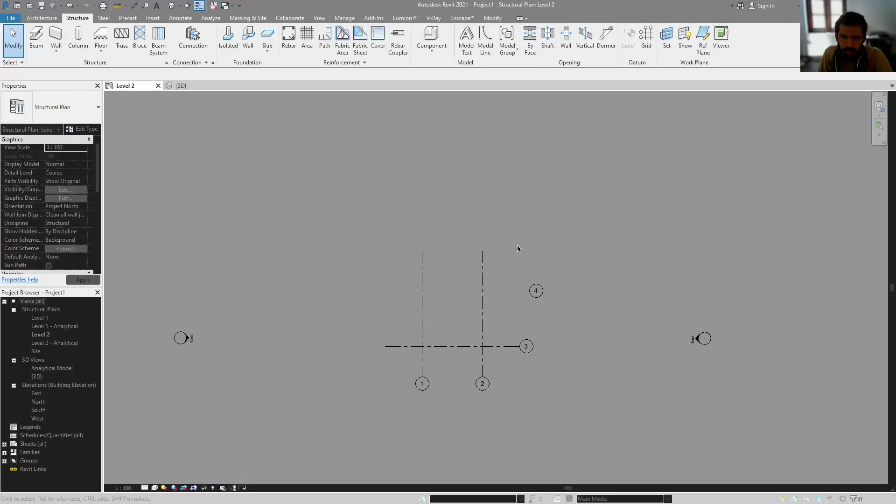Alright, so in this video, let's try to build the foundation, the simple isolated foundation with an inbuilt pedestal. So it's quite simple. First I'm gonna place a column right here. So we're right now in level 2 and the column goes right until level 1 right at grid. Okay, so that's quite a simple way to fix a column in Revit Structure.

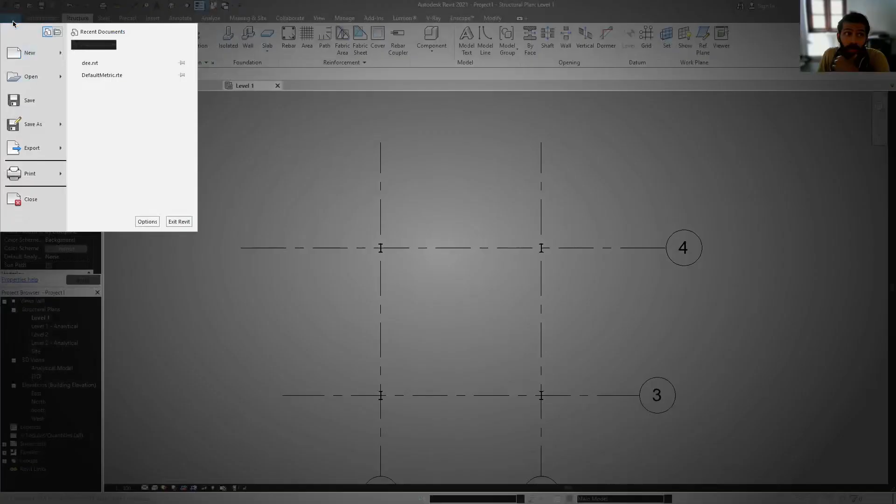Now let's get into level 1 and let's try to build a foundation right here. So in order to build a new foundation, I'm gonna get into family. As we are building the foundation, let's pick up the Metric Structural Foundation right from here. And as of now, you can see a cross right here, and if I get into the front view, you can see that there will be a reference level.

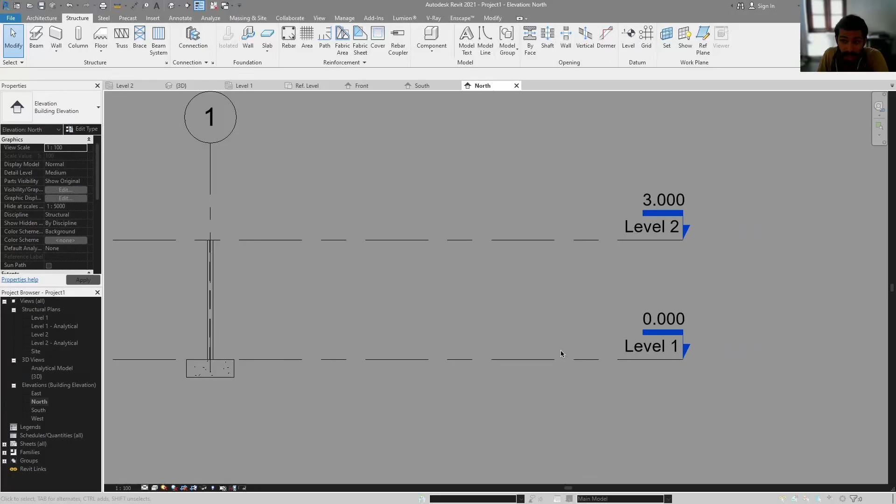If I place a column right here and get into the front view, north elevation, you can see that the top of this foundation rests right in level 1. So we want to build it that way, so every part of the foundation stays beneath reference level 1. So let's try to build it right from here.

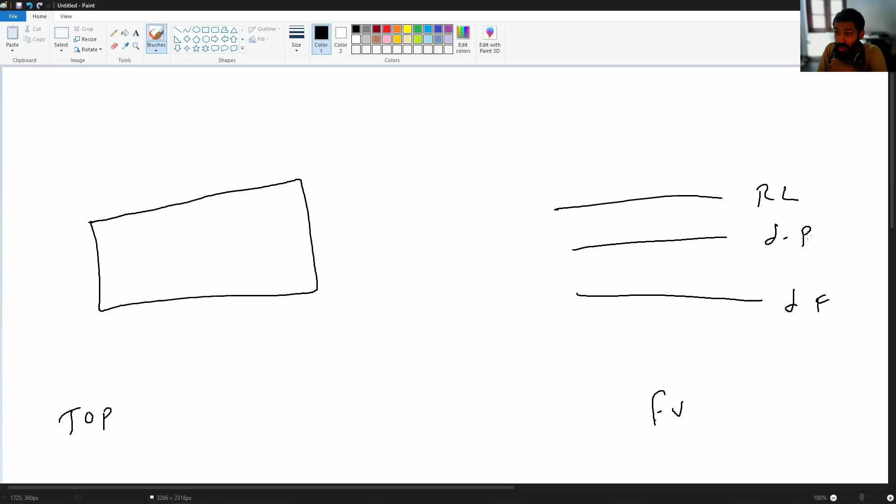This is the top view that I would like to draw, and this is the front view that I would like to draw, and this is our reference level, or level 1 you can say. Now I would like to have 2 more levels right here. This is the depth of foundation and this is the depth of pedestal. Okay, we are having 2 levels, and now from the top view, this will be our foundation that will be from DF to DP, and on top of it we'll be having a pedestal which can be a tapered one. So right now I'd like to have the shape like this.

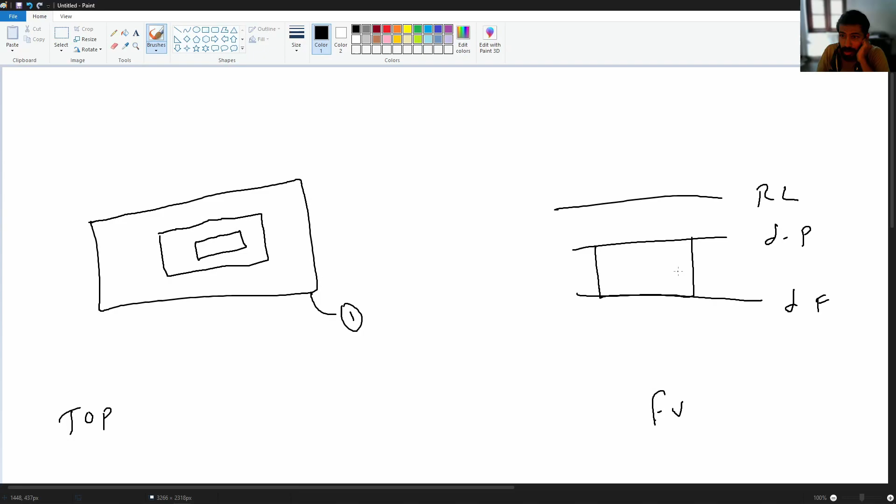So this will be tapered. So maybe this one will be our object 1. That object 1 will stay right from here. This is the front view of our object 1, and right now we are having a tapered object 2. This one will be a tapered pedestal. Okay, that might look something like this. This is our object 2. Okay, so let's try to build it.

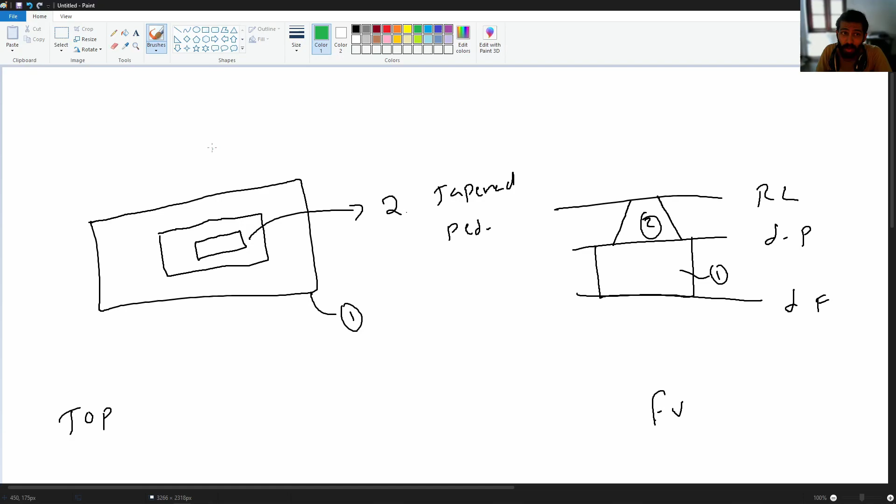No, it's not possible to build it without reference planes. So if you observe here, we are having a plane like this. Even in the reference level, we are having a plane like this. I'd like to set a plane that indicates the length of structure 1, so that's the first plane, and right here we are having the second plane, and right here the third plane. So essentially we would like to have 6 reference planes to control the length and 6 reference planes to control the width. Okay, let's try to build it.

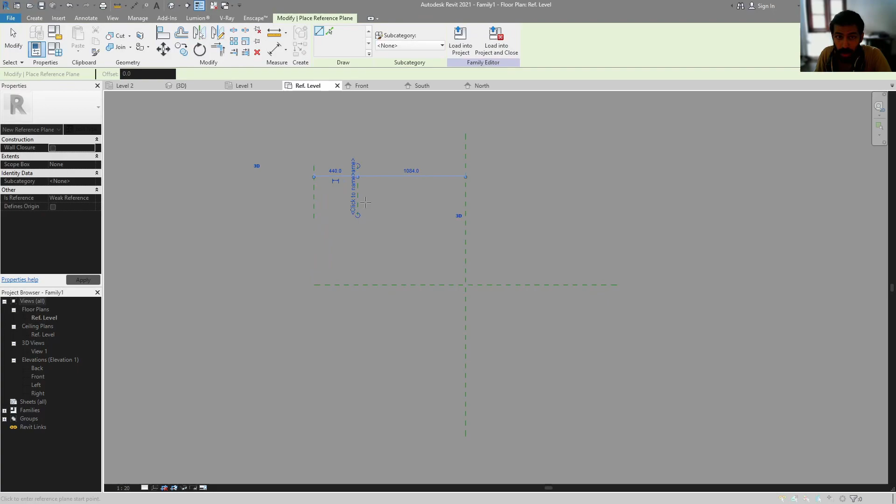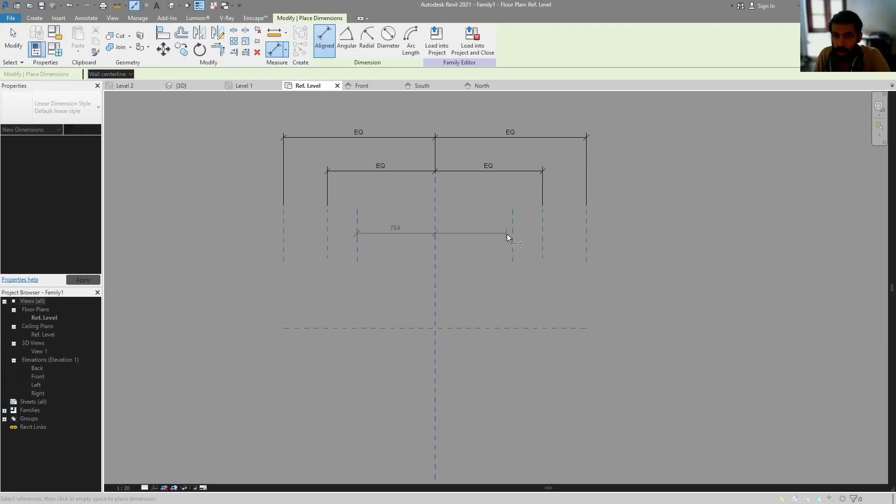So reference plane, create reference plane, 3 reference planes, first, second and third. Okay, I'd like to mirror it. Okay, that's great. And now let's try to add a dimension. First, center and last, equality. Second, center and n-1, equality. Third, center and n-2, equality.

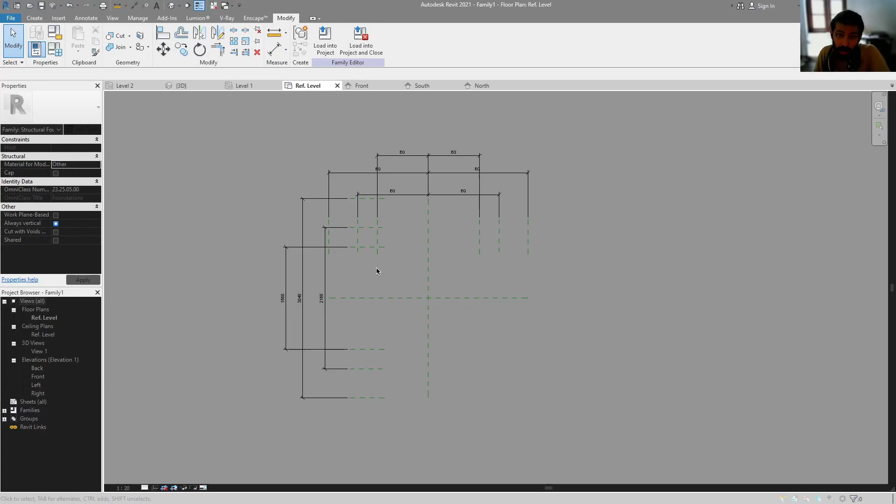Okay, now let me try to do one more thing. Let me copy or mirror it, because this one can only control the length. So what if I mirror it by angle 45 degrees? You can see that it is okay. But somehow the equality parameter has not been assigned. It really doesn't matter.

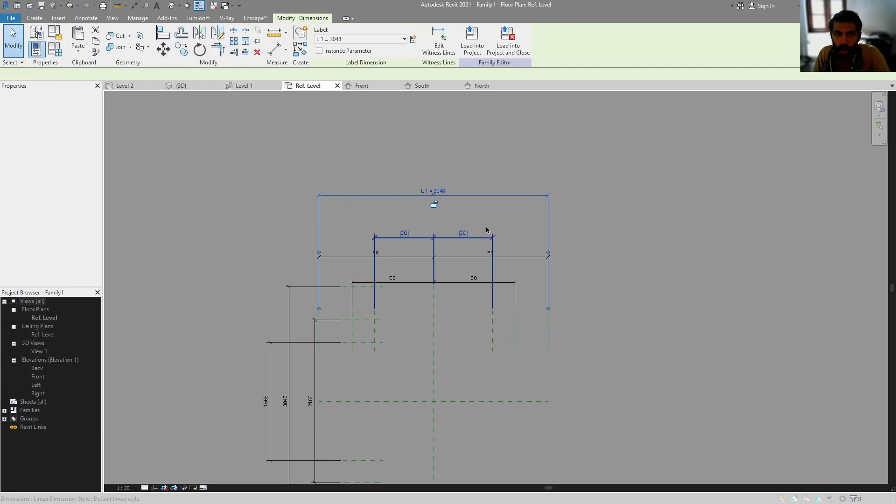From here to here, this will control the length of what? That will be the length of structure 1. Okay, this length of structure 1. Again, from here to here, this will control the length of structure 2. I can write it as L2. Okay, that will control L2.

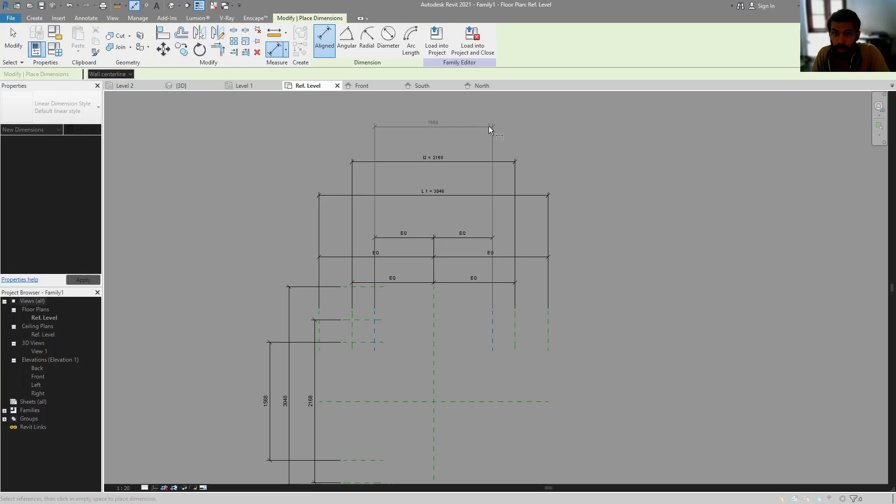Okay, the base of the pedestal, we can say. Again, get into here. From here to here, they will control, I think, the top of the pedestal.

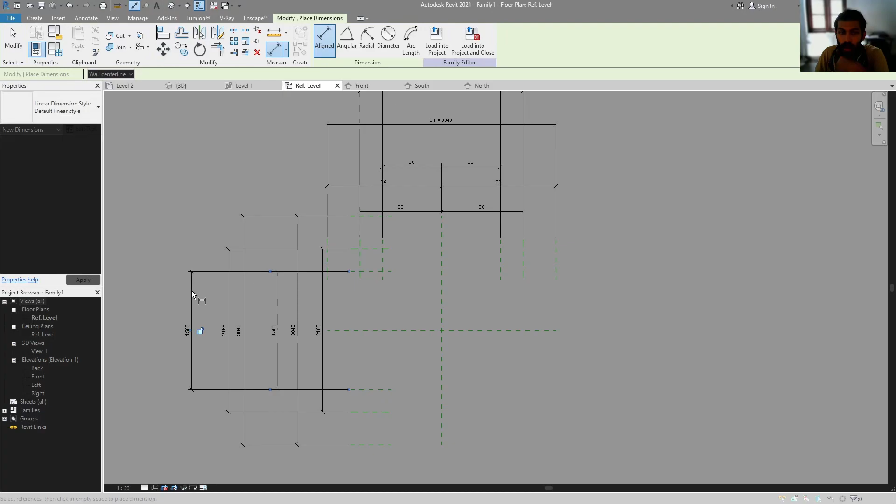Okay, let's do the same thing to control the width. I think from here to here, this will control width. 1, 2, 3. Okay, you can change the name and assign parameters, but essentially we're doing the same thing that will increase the length of video without any purpose.

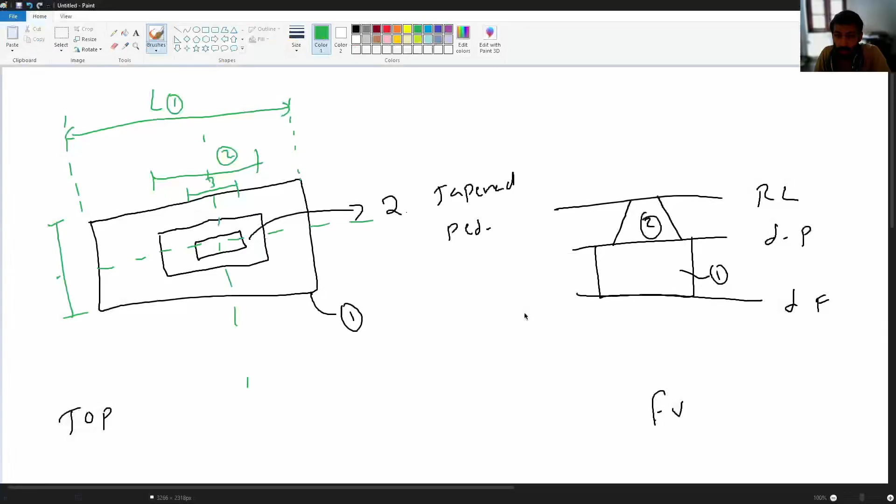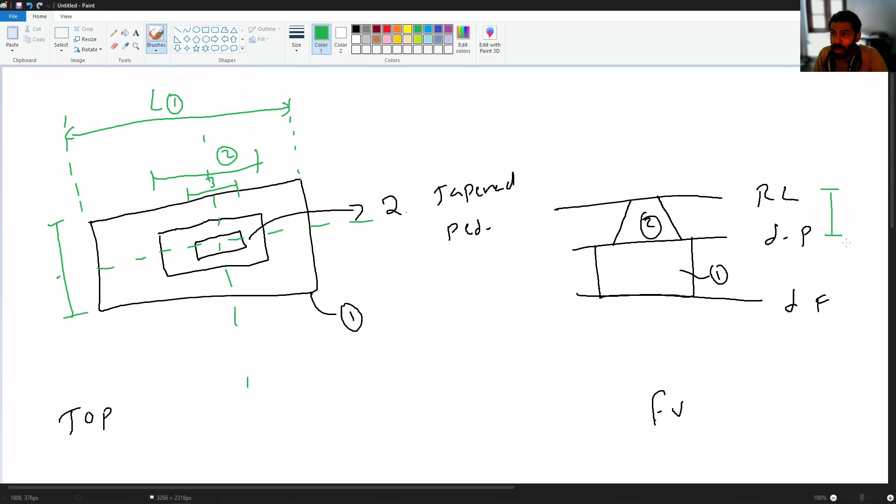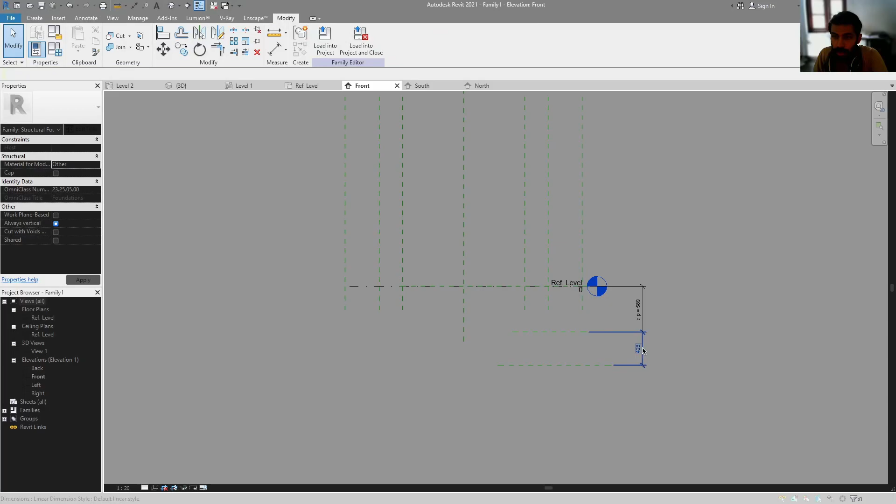Okay, let's change the height as a parameter. I can say that this one will control the depth of pedestal, and this one controls the depth of the actual foundation footing. So first point to second point, and first point to second point. Okay, assign a parameter. This will control depth of pedestal, and again this one will control the depth of footing.

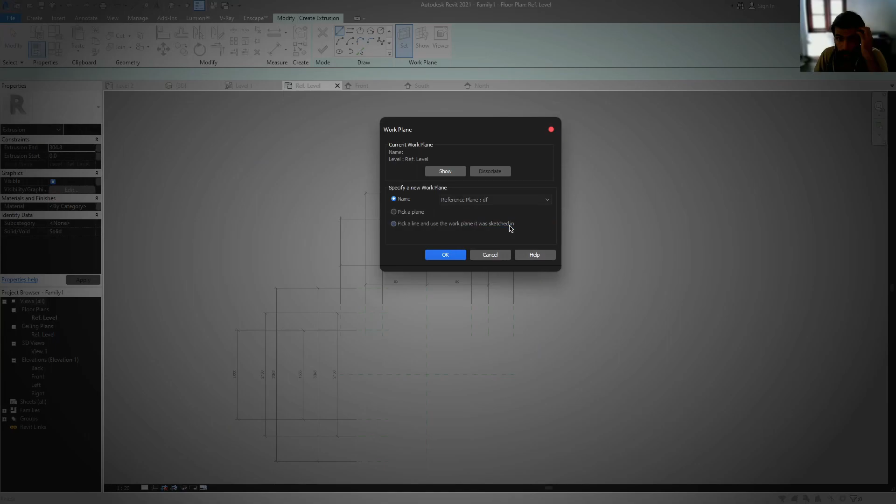Alright, that's enough. So I like to draw the base foundation right in this reference plane, that is DF. So I'm gonna get into the reference level and create an extrusion. I like to set a plane right in DF. Okay, that's the lowermost part right here. Now I'm gonna draw a rectangle without touching anywhere. Just draw it like this.

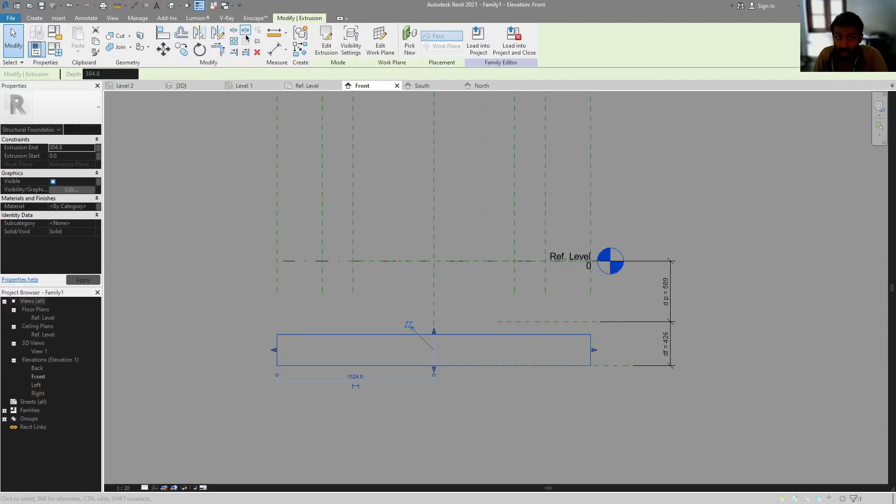And the next important thing is align lock to the extreme reference plane and lock it. Align lock, and finally align lock. Alright, that's okay. Now take it out, get into the south elevation, and I would like to align lock the top part of the foundation. Align and lock it. So the basement is totally completed. Now let's go for the pedestal.

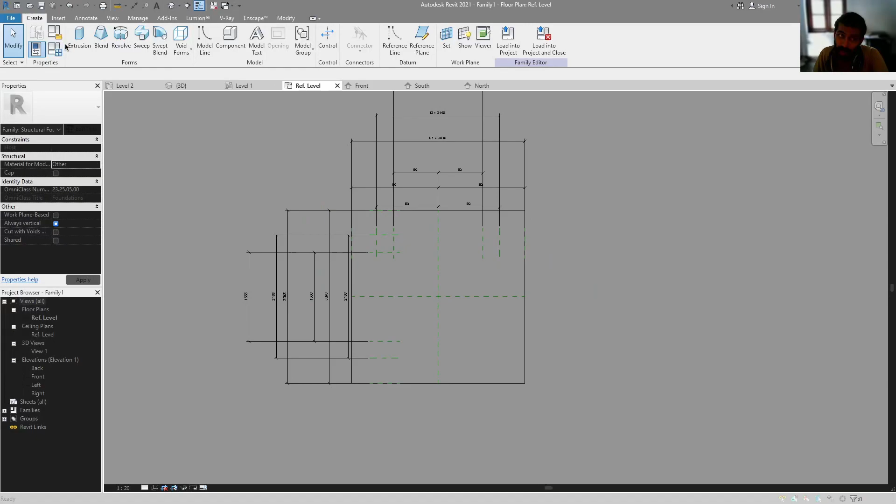Alright, in order to draw the pedestal, I like to set a reference plane right in here, that is DP. Okay, I like to draw this by making use of blend. Get into blend. I like to set a plane right in DP, where you can find the pedestal. Same procedure, we can draw a rectangle right here. Align lock. First is right here. I think the second is right here. I have no idea what I am clicking.

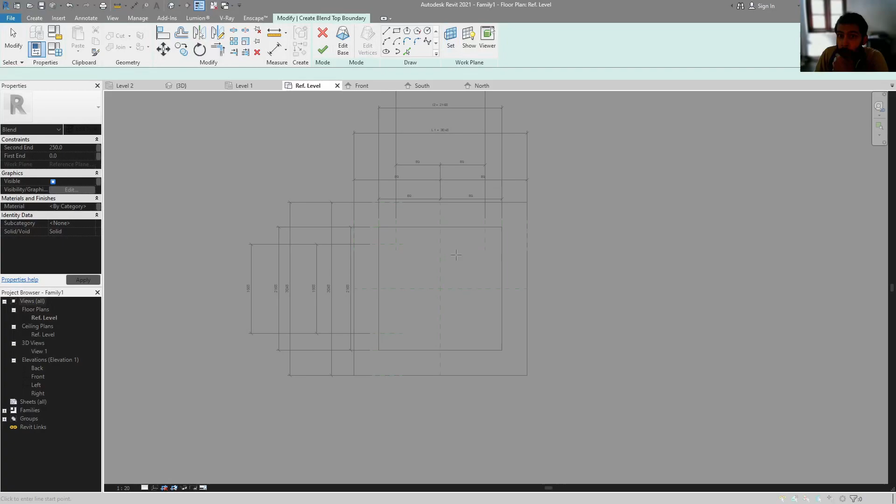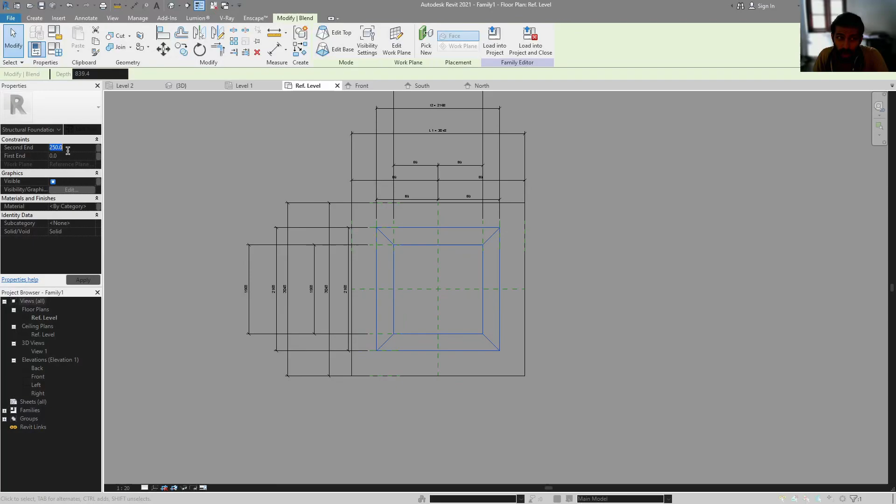Okay, now edit top. Again, I would like to set a plane right in the reference level, which is actually the top part of the blend profile. I like to draw another rectangle. Again, align lock, align one here, lock, one here, lock, one here, lock, and one here, lock. Alright. Okay, it's quite an unnecessary second end right here. Turn it back into 0.

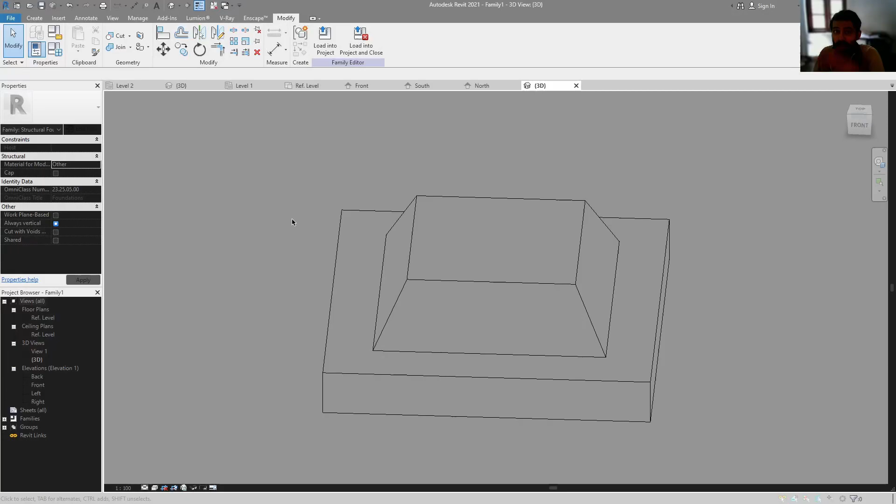Alright, if I get into 3D, you can see that's the pedestal, and if I try to flex it, maybe if I try to change the width of pedestal to 600, you can see that the depth is changing right here. Load into project, and I like to get into level 1, and again pick up isolate, and there you will see the foundation, or you can make use of the hide grid option here. Alright, get into 3D.